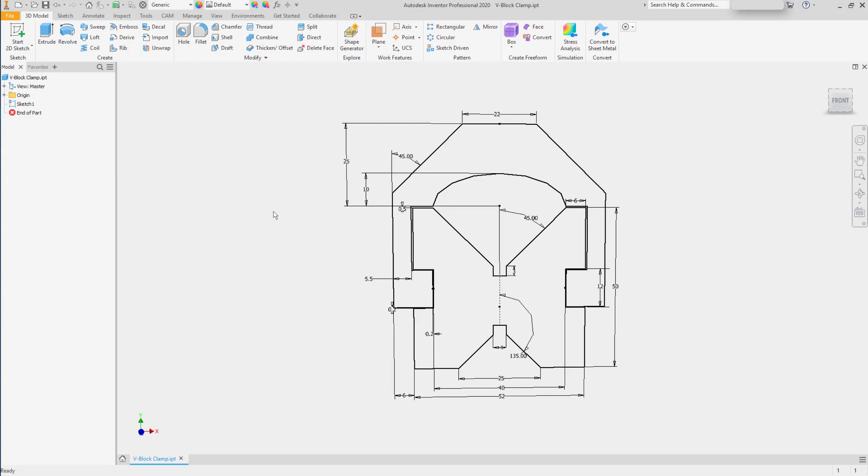Autodesk Inventor can use multi-loop sketches to define more than one feature from the same sketch. In this case, we have a layout sketch of an assembly.

But we're starting in a single file, so rather than creating an assembly directly, we'll take advantage of multibody modeling. Multibody geometry can allow you to test fit components in a single file, making sure that all of the geometry fits together in the fashion that you need without going through the trouble of creating multiple files. If, however, you need those bodies as individual files, you'll have to go through a secondary process, which we'll take a look at.

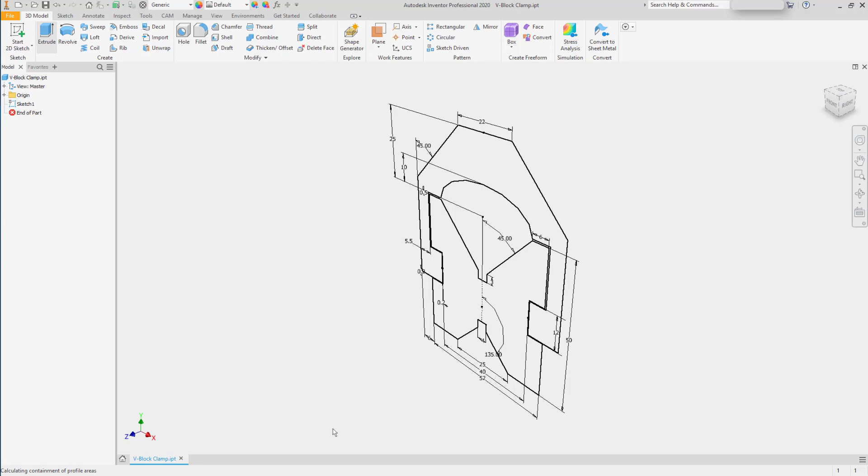We'll start out by using the Extrude tool and selecting the lower profile. We'll make the extrusion symmetrical and set it out a distance of 60 millimeters.

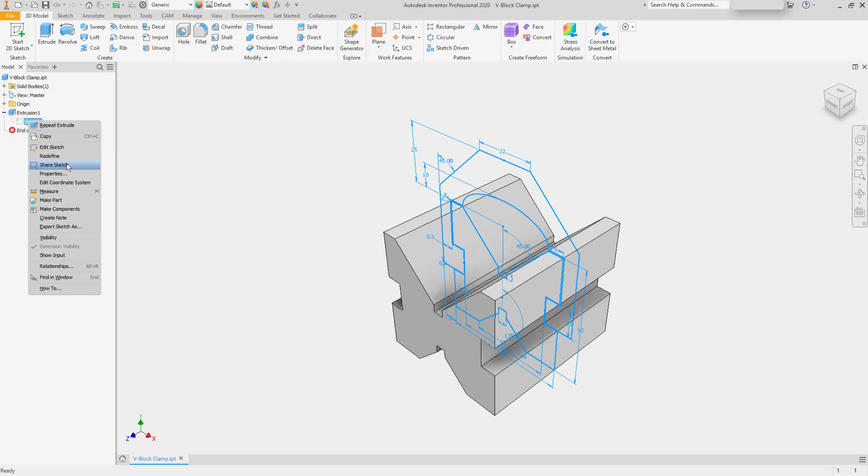Expanding the extrusion in the browser, right-clicking, and sharing the sketch will make the sketch available for a second body. I'll start the Extrude tool again. Then we can select the profile, once again making it symmetrical but 22 millimeters.

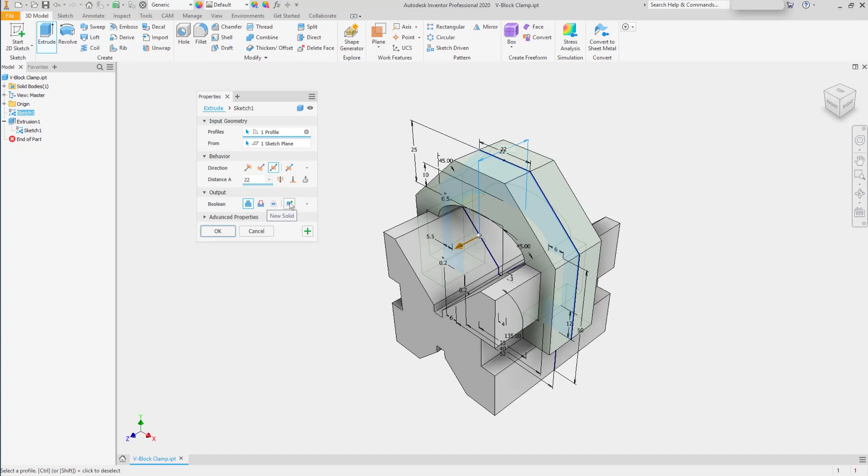Because the sketch geometry is external to the original body, Inventor will want to join it. So what we need to do is select New Solid as the option. This will create the extrusion as a separate solid.

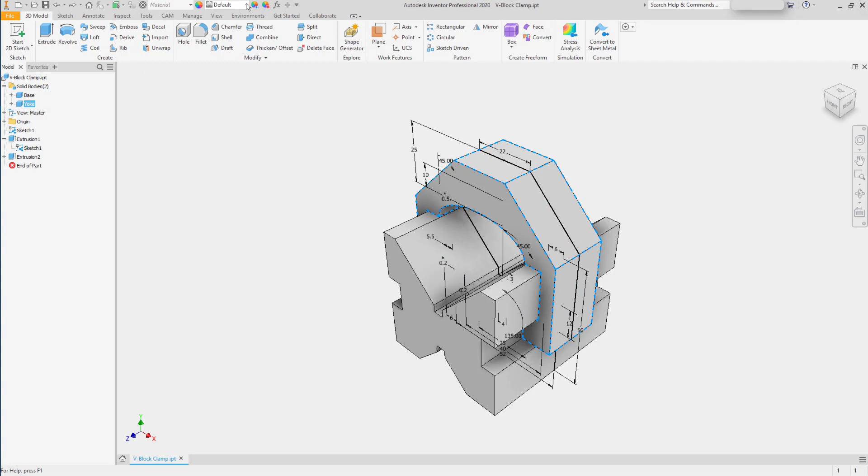If we expand the Solid Bodies folder, we can see that we have a solid for the base and a solid for the yoke. These bodies are held in place by their original position. We can make modifications to them as though they were separate components, but they are just separate bodies inside of our design. Selecting a body, you can even apply a different color specifically to that body.

Now we can turn the sketch off. And I'd like to introduce another body into the design. This time, this body will come from a step file. Choosing Import, I can select the clamp step file and click Open.

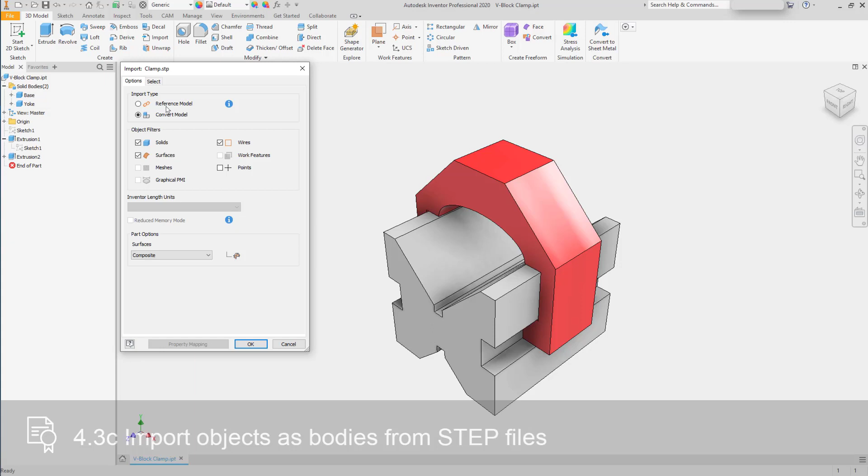We're given the option to link this as a reference model or convert it to a solid. We'll go ahead and convert it, and this will add another solid body to the design.

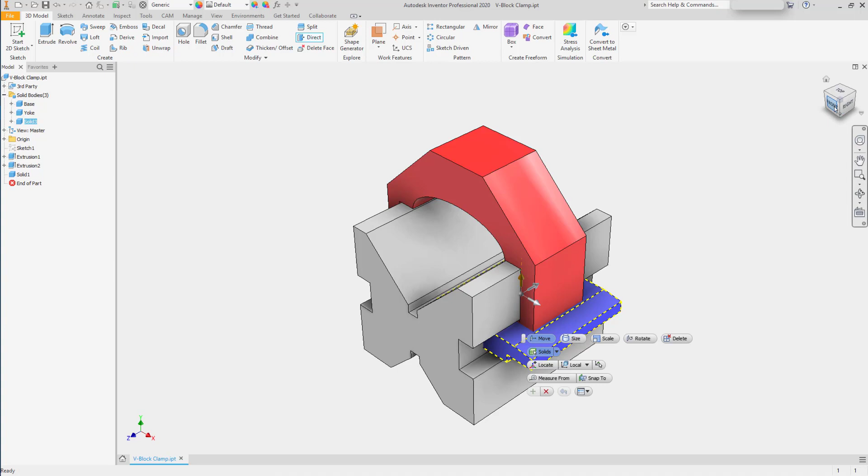Using the direct modeling tools, in this case the Move option, and selecting the solids, we can pick this clamp element. We'll make sure that we can see the origin so we can get a good idea. We're just going to rough in a location for this clamp. We want it to be slightly above the base, so I'm going to bring it down 21.5 millimeters.

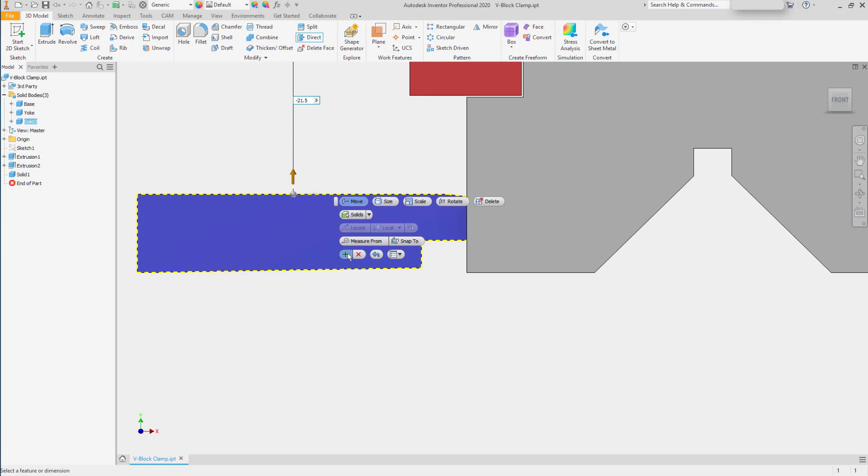We'll click Apply to place that clamp. With that body in place, we can close out of the direct modeling tools and start the Combine tool.

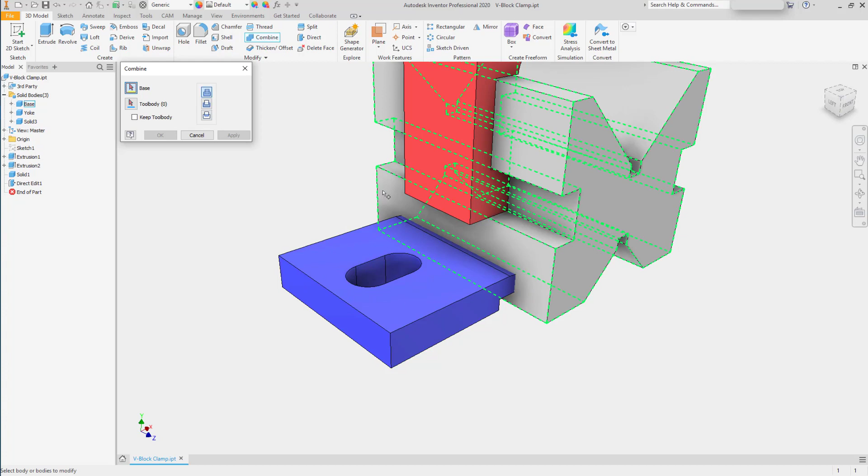What I'd like to do is subtract the clamp body from the base. So I'll select the base, then as a tool body, select the clamp body, subtracting it. This will create a notch in the side.

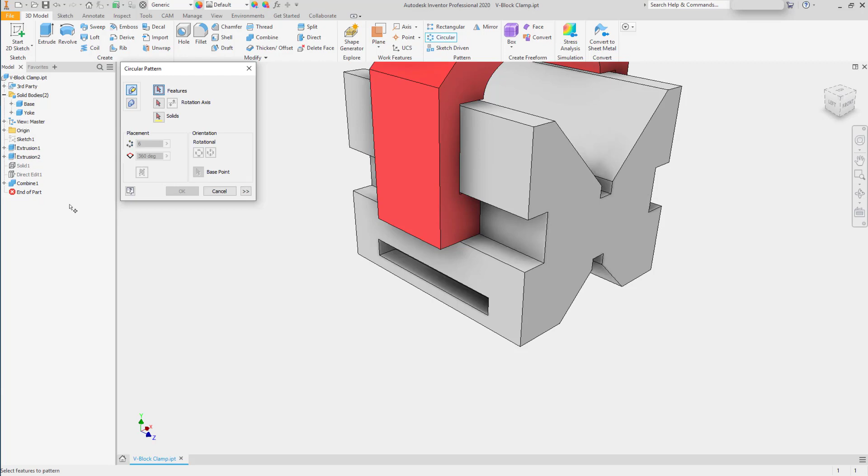Now I'd like to do a circular pattern, selecting that combine feature, and then using the y-axis of the model to create a second instance on the other side.

Now we can use direct modeling tools to create some additional clearance, but for now, let's just leave those models as they are.

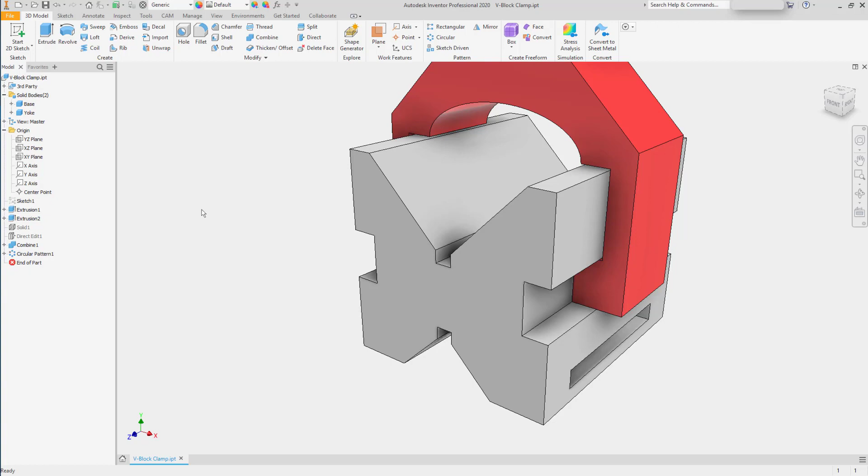What we have on the screen is effectively a representation of assembly made up just of bodies in the solid. What we'd like to do now is go ahead and publish an actual IAM assembly file and convert the bodies into IPT part files and link those into that assembly.

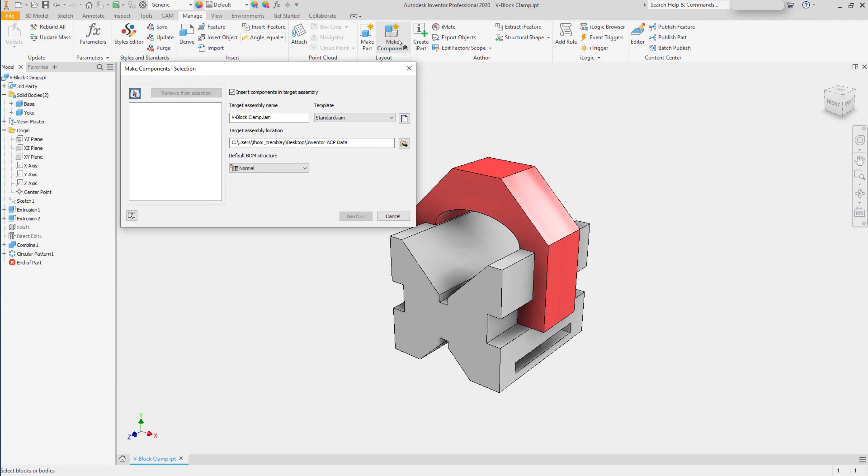To do that, we'll go to the Manage tab and select the Make Components tool. Selecting the base and the yoke, we can establish what the assembly name would be, select a template, and select a path.

We can change out the individual templates for the part files and also change their individual part names. For now, let's go ahead and accept it as it is and click OK.

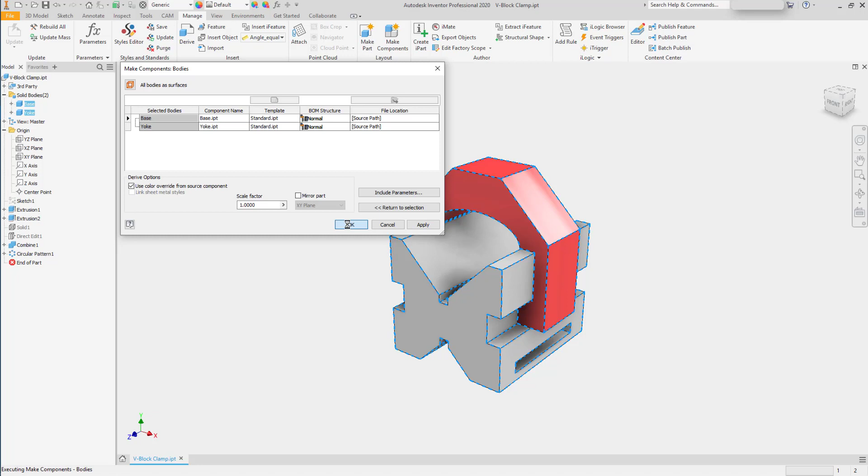After a moment, you'll see a new file has been opened, which is the VBlock assembly file. That VBlock assembly file, instead of having a base body and a yoke body, these are now part files that are linked to the assembly.

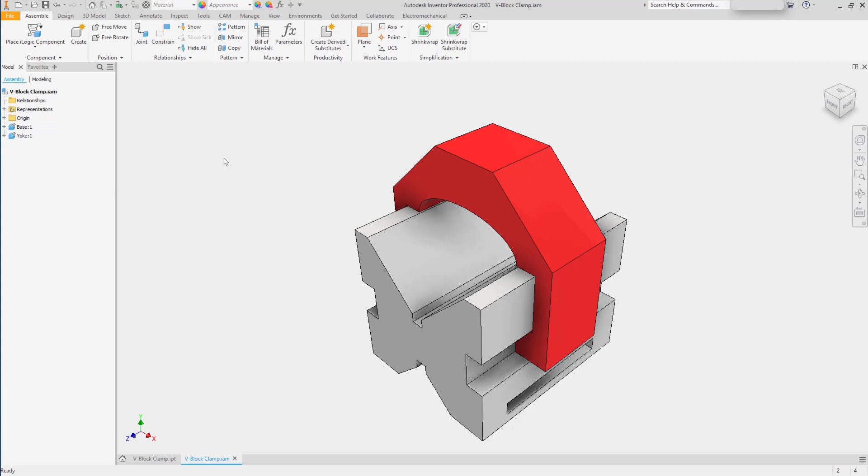We can make modifications to these files, make any changes we like. So if I were to activate the yoke, add a hole, I can reference the model edges like I normally would.

You'll notice that this part is in inch units. So I have to use metric units to place the hole based on the dimensions I know. Make the hole all the way through. Finish off the thread specification.

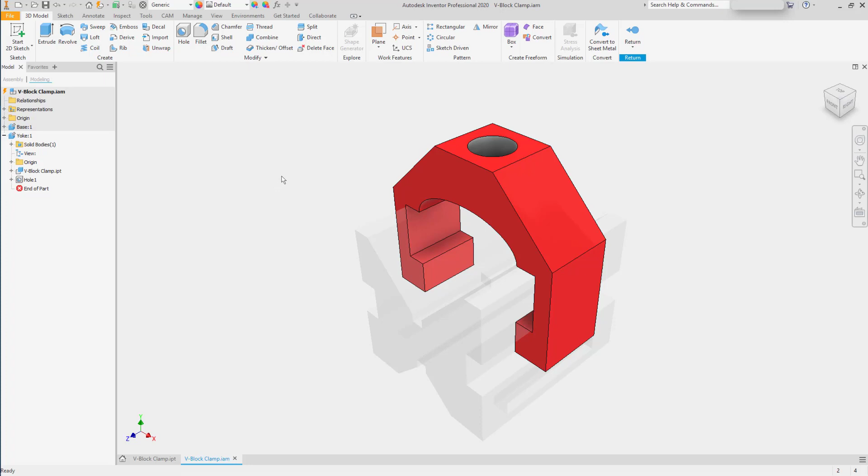And place the hole. Now the hole that's been placed into this model is not in the original body. The hole is a child of this component.

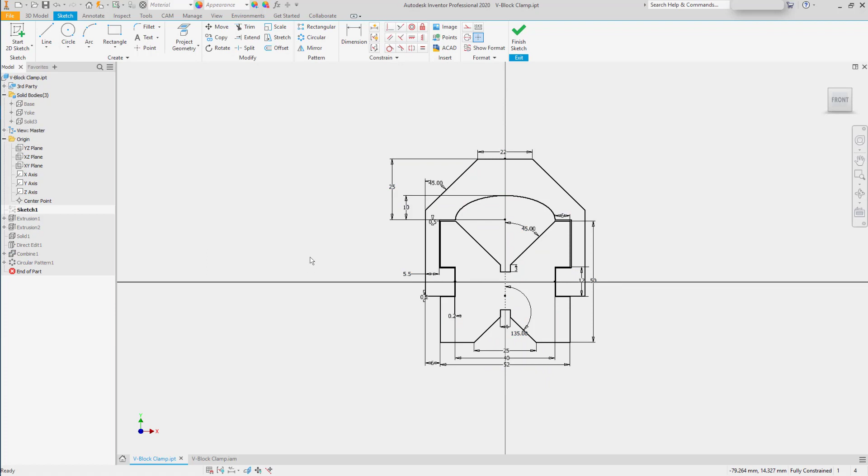However, if we go back to the original part file and make a modification, we'll see what the results are. For example, let's go to the original sketch and let's change the overall height from 50 millimeters to 60 millimeters. In the sketch, we see everything looks good. We'll finish the sketch. The bodies update.

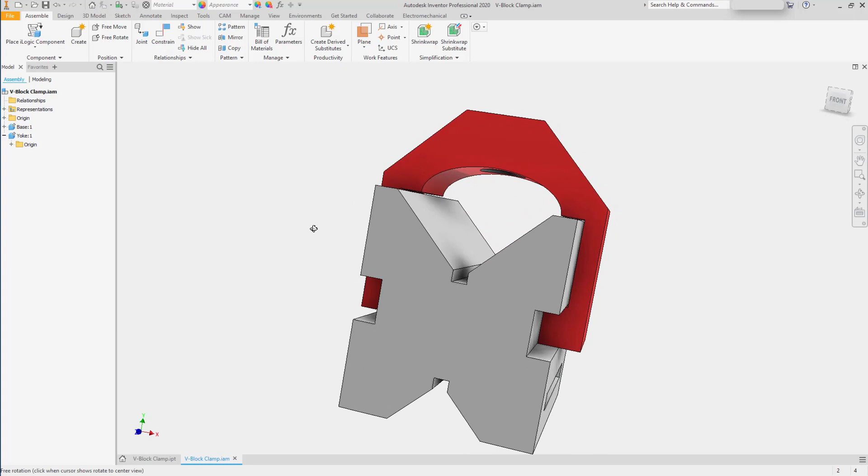Now, let's go back to the assembly file, and we'll see that the assembly file is out of date. Let's update it, and we see that both components and the assembly are up to date.